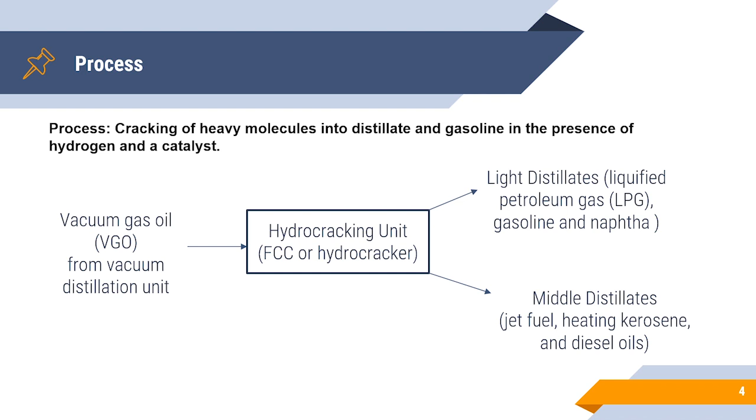Hydrocracking is the process of cracking heavy molecules into distillate and gasoline in the presence of hydrogen and a catalyst under high pressure and temperature. Vacuum gas oil from the vacuum distillation unit is sent to hydrocracking units such as fluidized catalytic cracking (FCC) or hydrocracker to be upgraded into light products, which can be further categorized into light and middle distillates.

Hydrocracking is a two-stage process that combines catalytic cracking and hydrogenation. Catalytic cracking breaks down high boiling aromatic stocks to produce lower molecular weight products with higher hydrogen content. Hence, products with lower yield of coke can be produced. Hydrogenation uses hydrogen to stabilize the reactive fragments produced during cracking, thereby decreasing formation of coke.

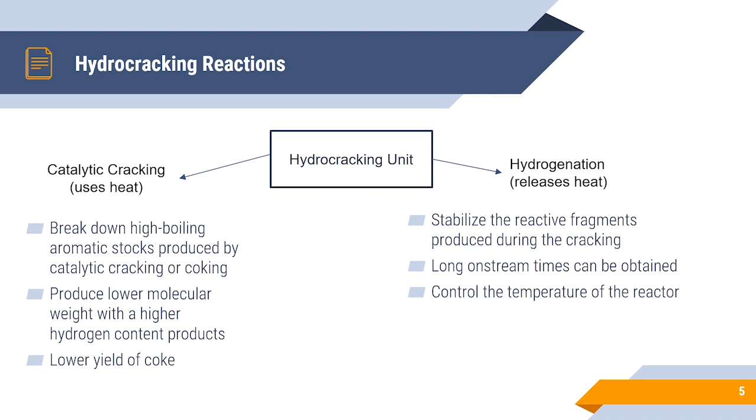As a result, long on-stream times can be obtained without the necessity of catalyst regeneration. Hydrogenation is also used to control the temperature of the reactor, preventing the reactor temperature from cooling to the point that cracking will not occur, and from rising too high, which can jeopardize the safety of the operation.

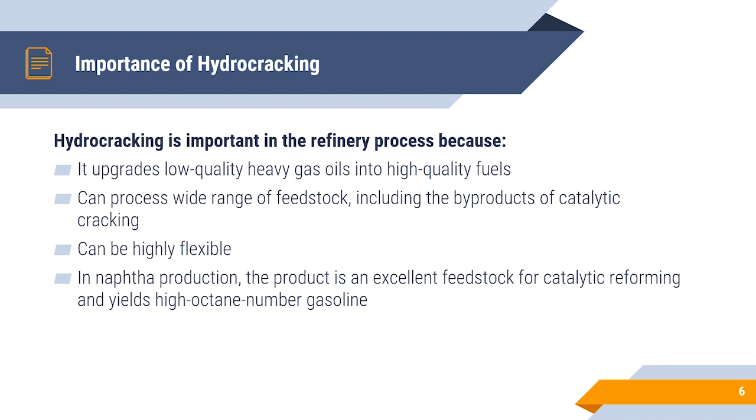One of the advantages of hydrocracking is upgrading low-quality heavy gas oils into high-quality fuels. Besides, a wide range of feedstock, including byproducts of catalytic cracking such as light cycle oil, can be processed. Hydrocracking is also highly flexible and can process light and heavy feedstock. In naphtha production, for example, the hydrocracked naphtha is an excellent feedstock for catalytic reforming and yields high-octane number gasoline.

Next, I'll explain about catalyst screening. The hydrocracking process is usually performed over an acid-metal bifunctional catalyst.

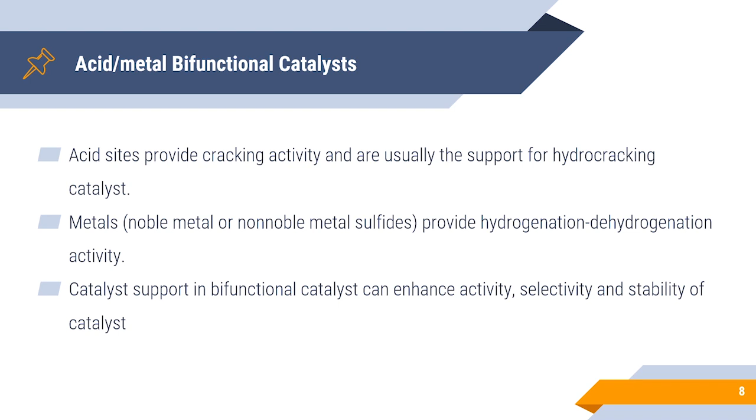The cracking activity is controlled mainly by the support, which is acidic in nature, whereas the hydrogenation-dehydrogenation activity is due to the metals loaded on the support. Catalyst support in bifunctional catalysts can enhance activity, selectivity, and stability by manipulating the surface properties.

For commercial hydrocracking catalysts, only zeolites and amorphous silica alumina are used commercially. From the table, we can see that zeolite-based catalyst has many advantages in terms of activity, stability, regenerability, and resistance to substances that can interfere with catalyst activity.

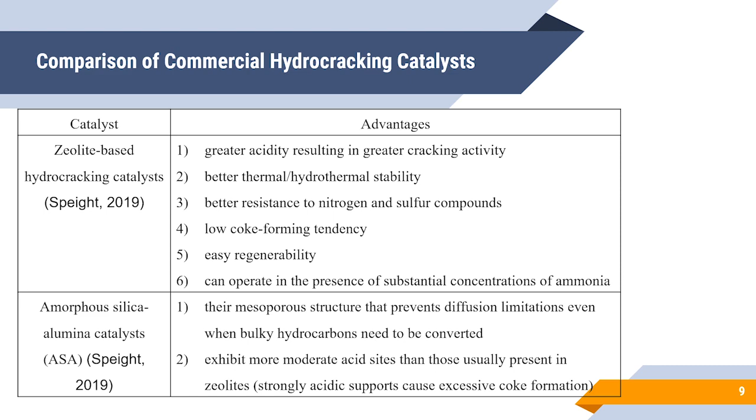As for ASA, its mesoporous structure can prevent diffusion limitations, and it exhibits a more moderate acid strength compared to the high acidity of zeolites, which will result in catalyst deactivation due to coking.

For metal sites, metal sulfides supported on gamma Al2O3 are generally used. Gamma Al2O3 can promote excellent cracking activity with its high specific surface area, while hydrogenation catalysts like nickel tungsten and nickel molybdenum are widely used because they are cheaper and more resistant to sulfur compounds.

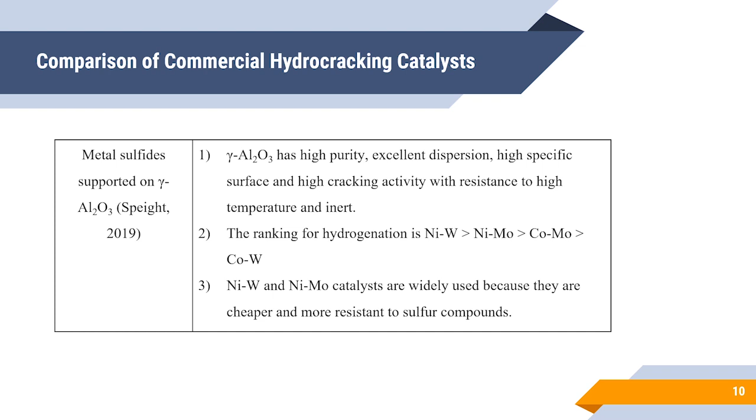Since zeolite-based catalyst has better overall performance, we will further investigate different zeolite catalysts. Nickel molybdenum on beta zeolite has higher activity due to a higher concentration of Bronsted acid sites compared to Y zeolite. Despite that, Y zeolite has higher mesopore volume.

Its larger mesopores and high acidity promote the diffusion of VGO and accessibility to the active catalyst sites, with improved stability resulting in higher yield of gasoline with low coke formation.

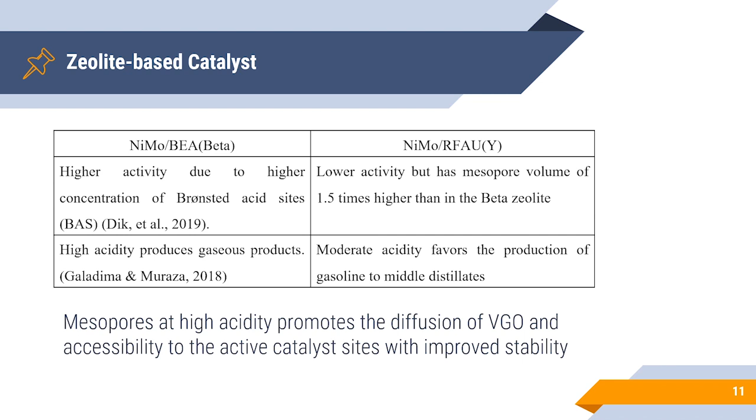Our choice of catalyst is nickel tungsten supported by gamma Al2O3 with modified Y zeolite support, because catalysts containing noble metals on zeolite Y are more sulfur tolerant than those on other supports, with NiW being the most reactive solid for hydrogenation. Modified Y zeolite, with optimal zeolite acidity and improved availability of acid sites, performs good cracking activity to produce gasoline.

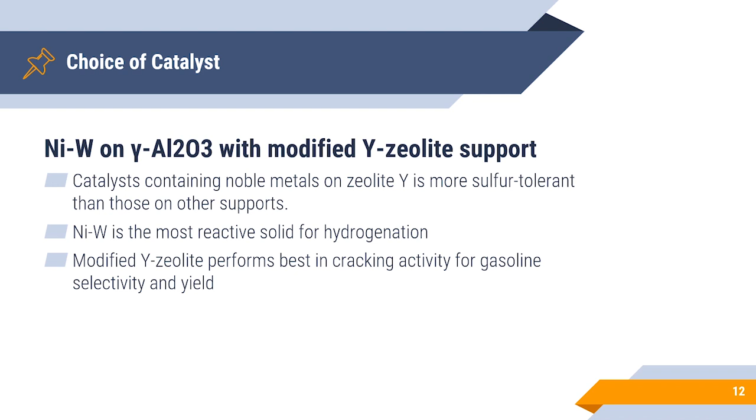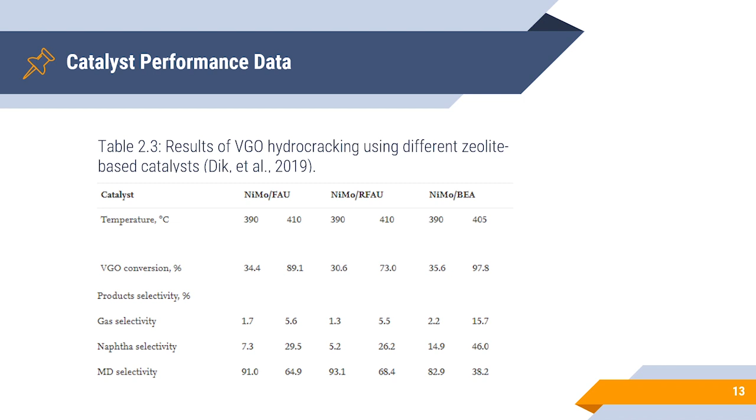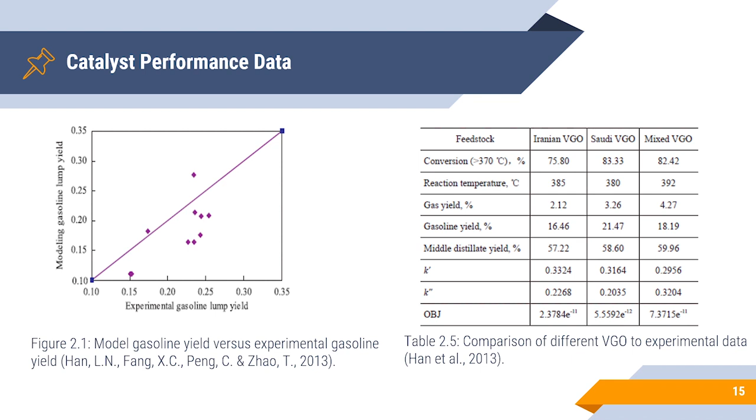From Figure 2.1 and Table 2.5, we can observe the gasoline data in terms of lump yield and conversion for different variables.

Now it's my turn to talk about reaction mechanism. The hydrocracking kinetics was studied in a fixed bed reactor over hydrocracking catalyst A, using a first-order kinetic scheme involving 4 lumps.

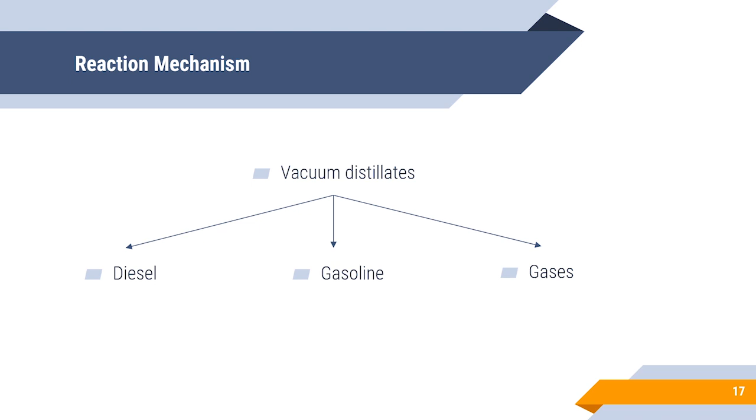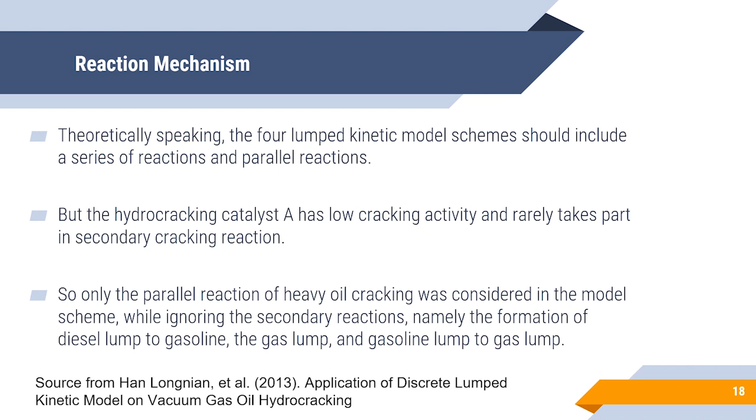After hydrocracking, vacuum distillates produce diesel, gasolines, followed by gases. Theoretically, the 4-lump kinetic model scheme should include a series of reactions and parallel reactions, but the hydrocracking catalyst A has low cracking activity and rarely takes part in secondary cracking reactions. So only the parallel reactions of heavy oil cracking were considered in the model scheme, while ignoring the secondary reactions, namely the formations of diesel lump to gasoline, the gas lump, and gasoline lump to gas lump.

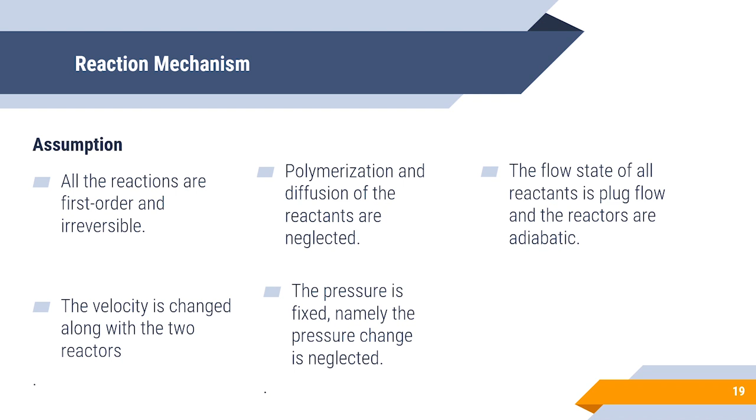We take the following assumptions into consideration: all the reactions are first order and irreversible. Polymerizations and diffusions of the reactants are neglected. The flow state of all reactants is plug flow and the reactors are adiabatic. The velocity changes along with the two reactors. The pressure is fixed, meaning the pressure change is neglected.

This is our reaction mechanism: A to B plus C plus D. A is vacuum gas oil, B is diesel, C is gasoline, and D is gases.

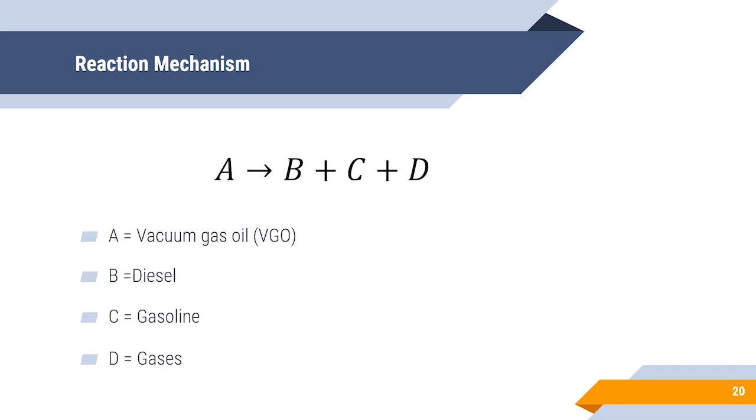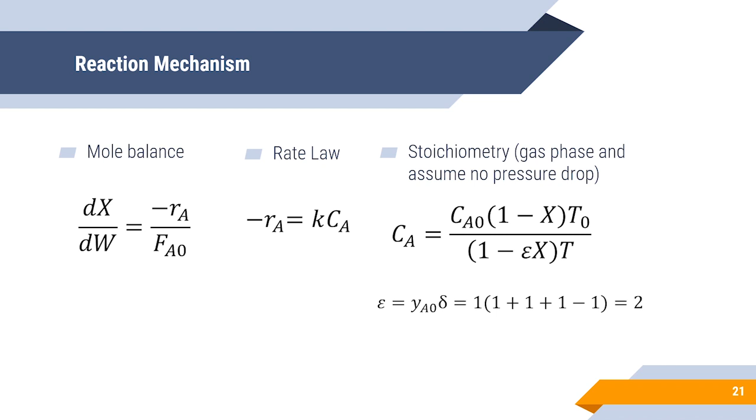First is the mole balance equations for the fixed bed reactor, followed by the rate law which is first order, and the stoichiometric equations with no pressure drop shown at the right side. The epsilon value of 2, YA0 is equal to 1, and the delta is 3 products minus 1 reactant. By combining three of the equations above, we can get the final form of the equations after rearranging.

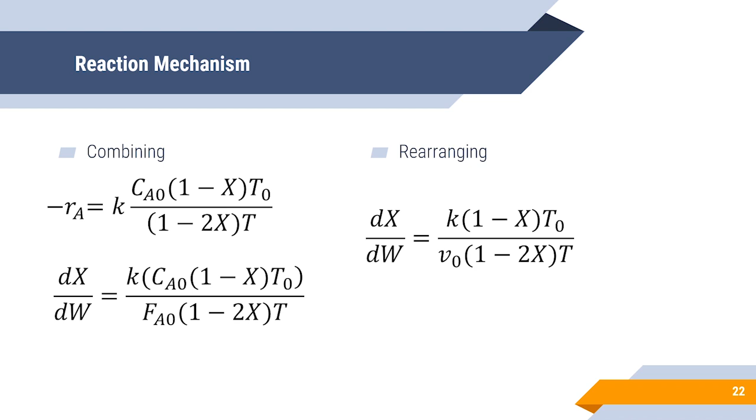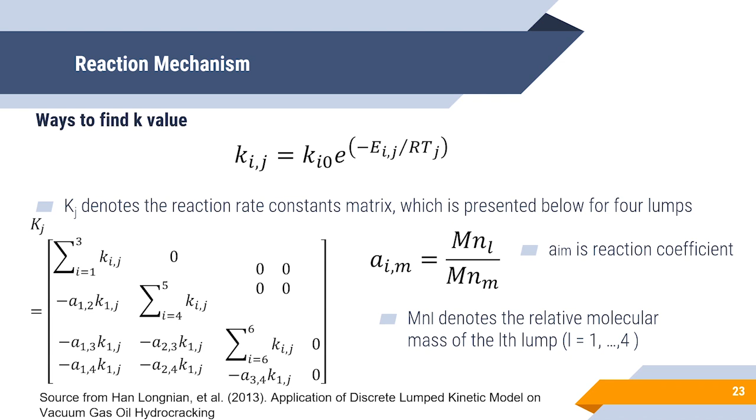In these equations, the only unknown is the K value, so we need to determine it. Normally we use the first equations to calculate the Kij value, but because of the 4 lumps, we need to use Kj, which denotes the reaction rate constant matrix, combined with the equations of AIM reaction coefficients and Kij rate reactions for 4 lumps to get the value of Kj.

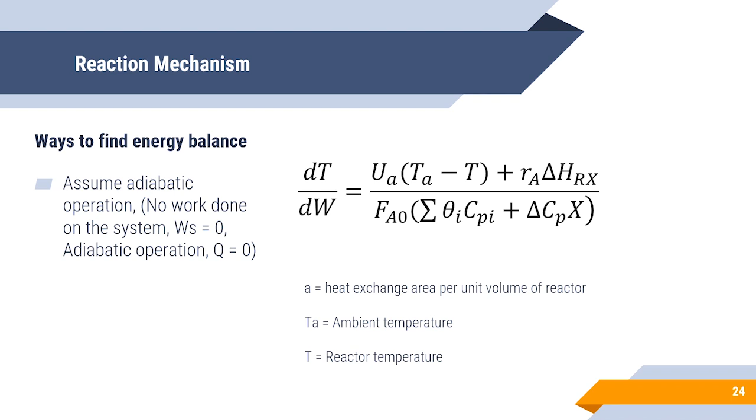Besides that, for the energy balance equations in the reaction mechanism, we assume adiabatic operations where Q equals 0 and no work is done on the system, Ws equals 0, which forms the equation above. From the equation, A denotes the heat exchanger area per unit volume reactor, with the equation area over volume equal to 4 over diameter. On the right side, total theta CPi will only form CPA since only A enters.

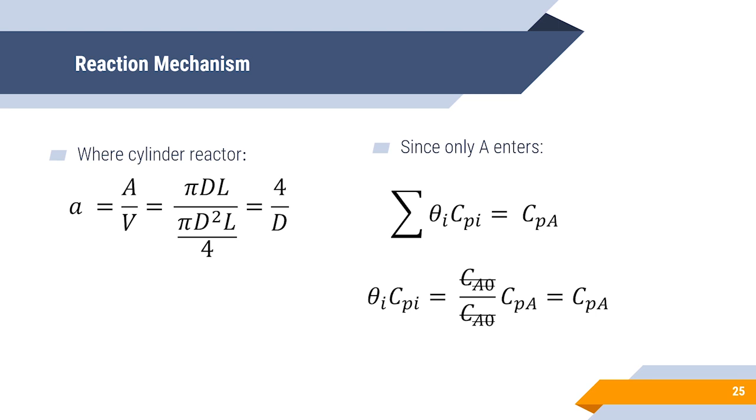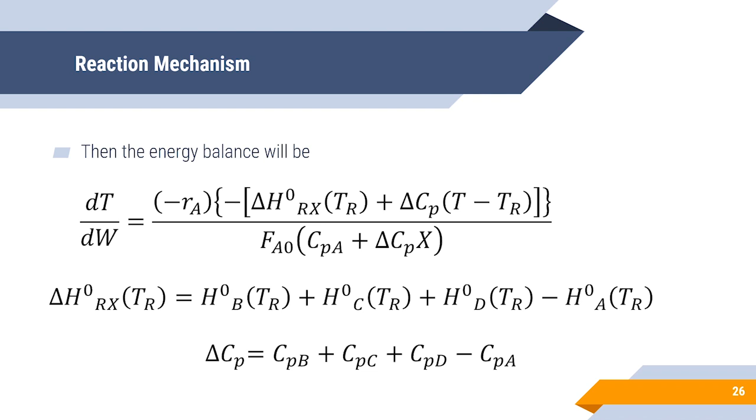This is the finalized energy balance equation, followed by the delta H0 Rx and delta Cp equations for this part of the reaction mechanism. My name is Jinhua.

Now I'm going to present part 4, which is the determination of basis for reactor design. Table 4.1 shows the main properties of the feedstock used in our hydrocracking reaction.

The feedstock used is Iranian vacuum gas oil, VGO. It has a density of 0.913 gram per cm3 at a temperature of 20 degrees Celsius. As we know, vacuum gas oil feedstock consists of multiple hydrocarbon compounds with different carbon numbers. Each hydrocarbon compound has a different boiling point.

The initial boiling point of Iranian vacuum gas oil is 336 degrees Celsius. For information, the initial boiling point (IBP) is the temperature at which the first drop of distillate appears after the commencement of distillation. Because vacuum gas oil consists of different hydrocarbons, it therefore has different distillation points.

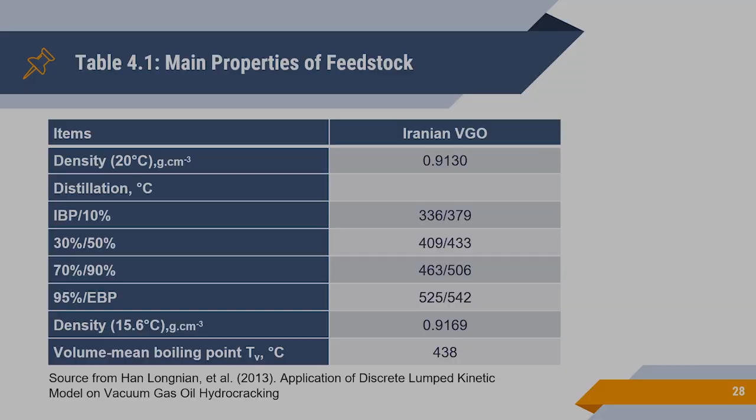For example, 30 to 50% of the vacuum gas oil boils at 409 to 433 degrees Celsius. The final boiling point is 542 degrees Celsius, and the volume mean boiling point of Iranian vacuum gas oil is 438 degrees Celsius. Table 4.2 shows the operation conditions of our reaction.

The reaction occurs at a temperature of 381 to 390 degrees Celsius, at a pressure of 15.7 megapascal. It has a liquid hourly space velocity, LHSV, of 1.5.

LHSV is the ratio of the volume of liquid feed per hour to volume of reactor. An LHSV of 1.5 means that for 1 unit volume of reactor, it can handle 1.5 unit volume of liquid feed. The hydrogen to oil ratio is set at 1500, and the inlet volumetric flow rate for vacuum gas oil is 1000 liters per second.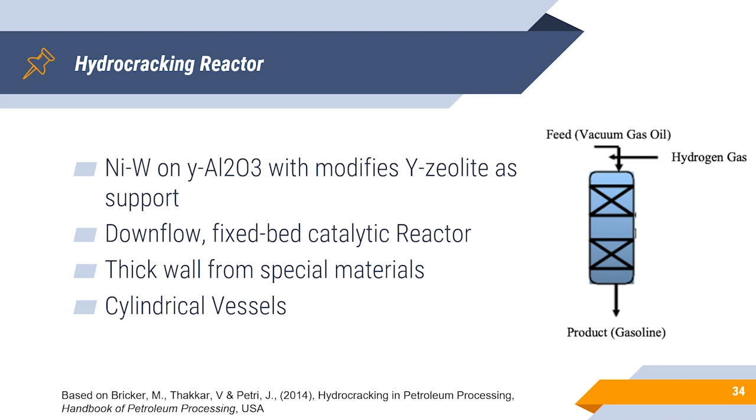The thick wall is constructed from special materials to vessel the reactors, and the reactors are usually cylindrical vessels with stabilized austenitic stainless steel for corrosion protection. Since hydrocracking is an exothermic reaction, the reactor temperature has to be controlled.

A commonly used commercial hydrocracker consists of several separated catalyst beds. This is because it will be able to manage the heat release with quenches in between the catalyst beds. In order to control the reaction rate and also to allow safe and steady operation, the fluid exiting one catalyst bed has to be cooled prior to entering the next catalyst bed.

Therefore, cold hydrogen gas is injected into the quench zones. Separating catalyst beds using quench zones can achieve the following functions: cooling of the partial reacted fluids using the hydrogen quench gas, assuring constant temperature distribution of fluids prior to entering the next catalyst bed, and mixing efficiently and dispersing evenly of the fluids over the top of the next catalyst bed.

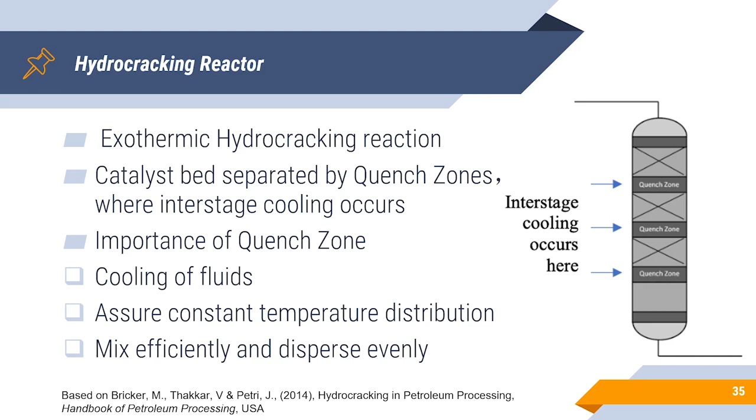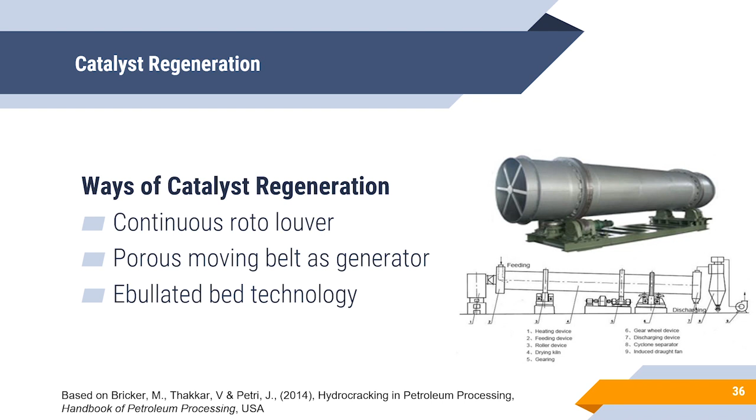To remove coke formed upon combustion, ways used for catalyst regeneration are continuous roto-louvre, porous moving belt as generator, and the ebullated bed technology. Since the catalyst we had chosen is a metallic compound supported on pelleted alumina, this catalyst can be regenerated in situ with air, steam, or flue gas through a temperature cycle of 400 degrees Celsius to 650 degrees Celsius. On-stream cycles of 4 to 5 months can be obtained at this sulfurization level of 65% to 75%, and the catalyst life can be as long as 2 years.

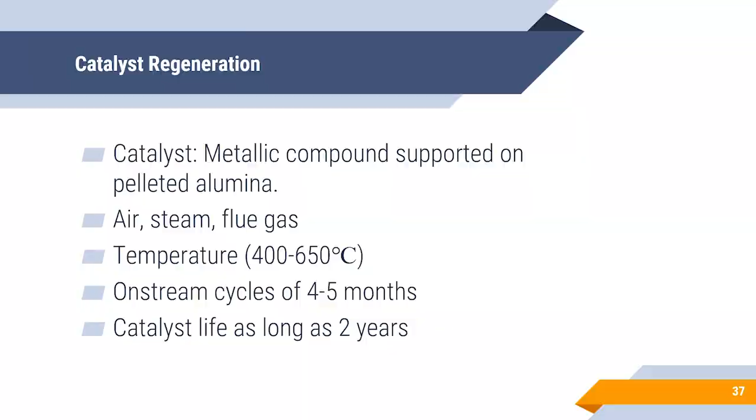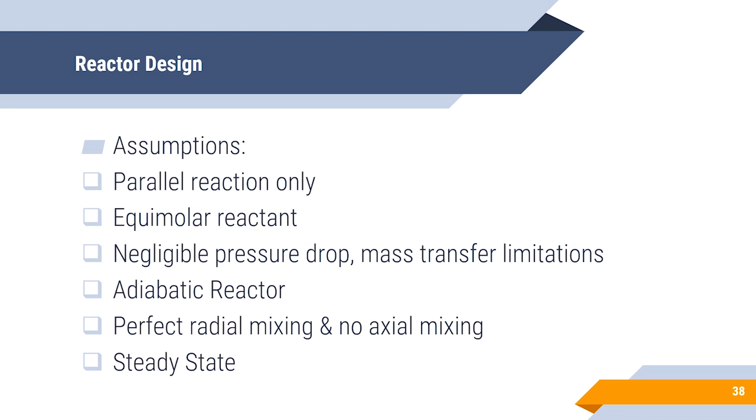In order to design our reactor, a few assumptions have been made to aid the calculation: parallel reaction only, where secondary reactions are neglected; equimolar reactant; negligible pressure drop; negligible mass transfer limitations; adiabatic reactor; perfect radial mixing and no axial mixing in temperature, velocity and concentration; and steady state.

After completing the detailed calculation, we obtained that the amount of catalyst required for the reactor is 3,232 kg, while the volume of PBR is 5,958.29 liters. The detailed calculations will be appended in the report.

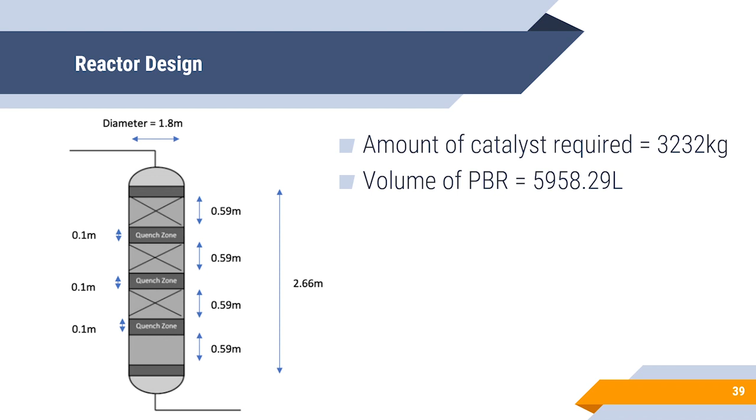On our left is the reactor dimension, where it consists of 4 catalytic bed reactors and 3 quench zones. The height for each catalytic bed is 0.59 meter, while the quench zone is heighted at 0.1 meter each. The radius of the reactor is 0.9 meter, while the total height of our packed bed reactor is 2.66 meter.

For summary and conclusions, we had talked about catalyst screening, reaction mechanisms, determination basis for reactor design, reactor selection, and reactor design for our topics.

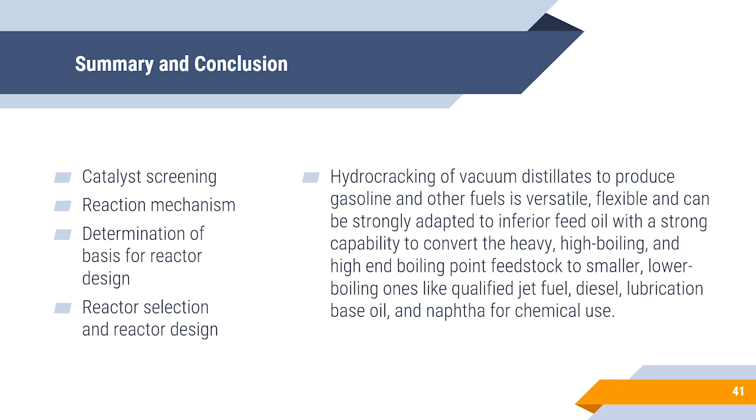As conclusion, hydrocracking of vacuum distillates to produce gasoline and other fuels is versatile, flexible, and can be strongly adapted to inferior feed oil, with a strong capability to convert heavy, high boiling, and high end boiling point feedstocks to smaller or lower boiling ones like qualified jet fuel, diesel, and naphtha for chemical use.